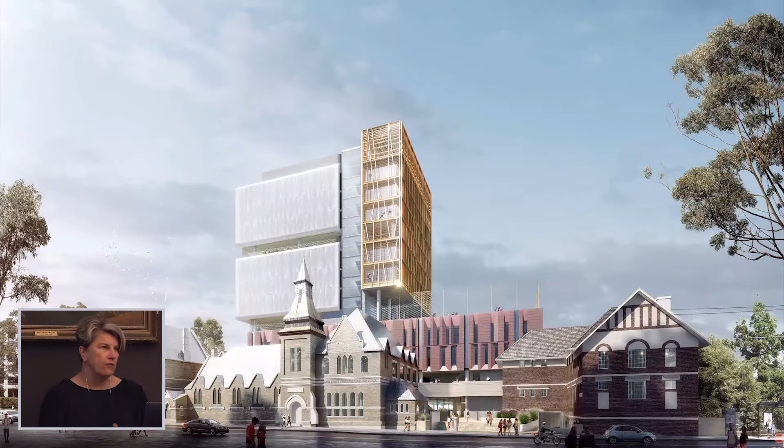Great, thanks a lot, Charlie. And thank you all for the invitation to discuss with you our involvement in this new high-rise education phenomenon. As an architect, education is currently a really exciting and rewarding space to be in. All states in Australia are committing to really extensive construction programs, up to billions of dollars worth of construction. As a practice, we're really fortunate to be involved with Schools Infrastructure New South Wales' new Inner Sydney High School, which is actually their second high-rise school currently under construction in Sydney.

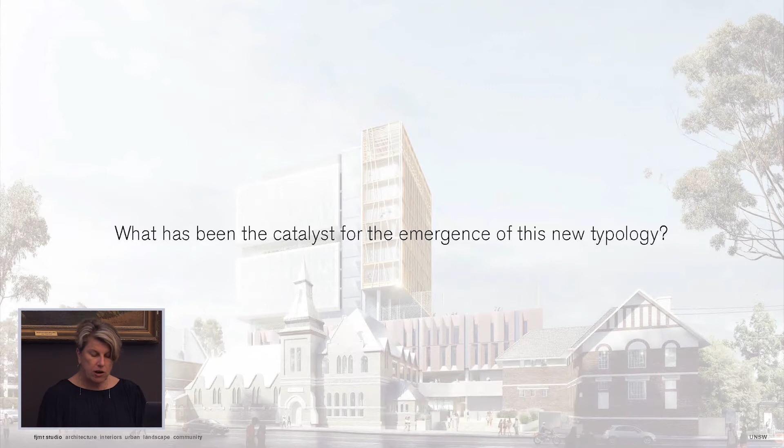This new typology of high-rise schools presents a new challenge. Not only are we exploring new built forms, vertical as opposed to horizontal, but we're also looking at new ways of learning, with the majority of educational providers, be they public or private, launching themselves into the 21st century and designing spaces to facilitate future-focused learning.

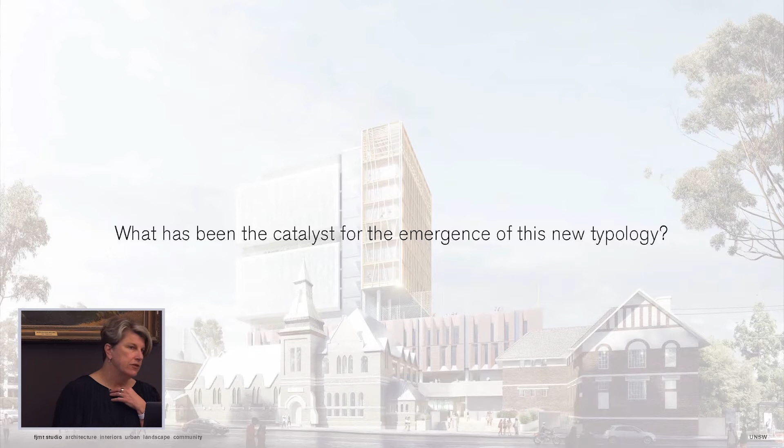As part of this process, there's a few really important questions that we need to explore. The first one is, what has been the catalyst for the emergence of this new typology? The second, what is the relationship between the new pedagogical methodologies and the built environment, and ultimately what actually does a future-focused school look like? How can clever spatial planning, developed out of a set of educational and design principles, provide an appropriate framework for a school which can be adaptable into the future? And in this context, how can we actually learn from lessons of the past as well?

And specific to the Inner Sydney High School, how can we provide a flexible framework while responding to the reality of a highly constrained site and the pragmatic requirements of a large complex building? The interesting thing about these high-rise schools is all the benchmark data which the departments of education in the various states have is always based on horizontal schools, not on vertical. So there's a whole lot of other aspects which have to go into a vertical building, such as smoke exhaust, lifting, things like that. So how do we actually wrap that into current budgets and also briefs which are pre-formed by these departments?

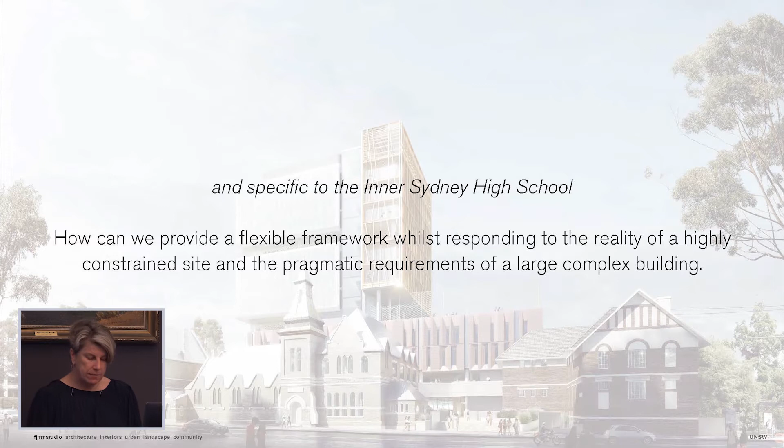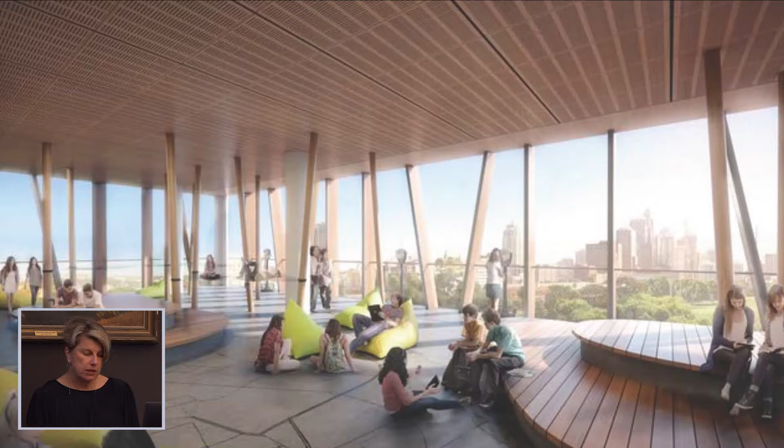Using the Inner Sydney High School as an example, I'll try and give you some insight into how we as a practice started to investigate these issues. A quick background so that you can understand our context for this new school typology. FJMT, we're the head design consultant for this project, following a successful design competition, which came out of an extensive EOI and RFT process, which actually commenced in 2015. The competition was informed by work which was done by the New South Wales Department of Education, DWP Suters and New Learning Environments, who are educational consultants, on the development of a framework for a new vertical campus, and that formed the basis of the brief, which we then took into competition mode.

We were awarded the commission at the beginning of 2017, and now we're approximately 2 months into a D&C contract with the main contractor, who's Hansen Yuncken. And 2 days ago, they just started doing the first excavation, which was pretty exciting. Our brief is for a comprehensive co-educational high school of 1,200 students.

The school will serve the local area, and it provides relief for the many high schools which are either at capacity or nearing capacity. We don't yet know who the school community will be, but it's essentially going to be the inner city students who live in the adjacent suburbs. They're still working out what the boundaries are.

It's primarily a school for the community, and I suppose the reality of who the community are will be evolved once the new principal is announced, which is actually quite soon because the academic year is almost finished. An important aspect of this school is that, similar to other major schools that the New South Wales Department of Education are developing with new pedagogical approaches, the principal will actually have the opportunity to handpick their staff, which is very important because it means the staff will be completely engaged with the model, which will probably be the success of this school.

The new inner city high school is the second high-rise school to be developed by New South Wales Department of Education. The first, the Arthur Phillip High School by Grimshaw and BVN, is a transformation and then an expansion of an existing school with a new 17-storey tower to accommodate 2,000 students in the tower portion. Arthur Phillip is quite different from this school because here we are working with the theoretical model. At this point we have no staff, no students, so it's really quite an interesting exercise to go through that process.

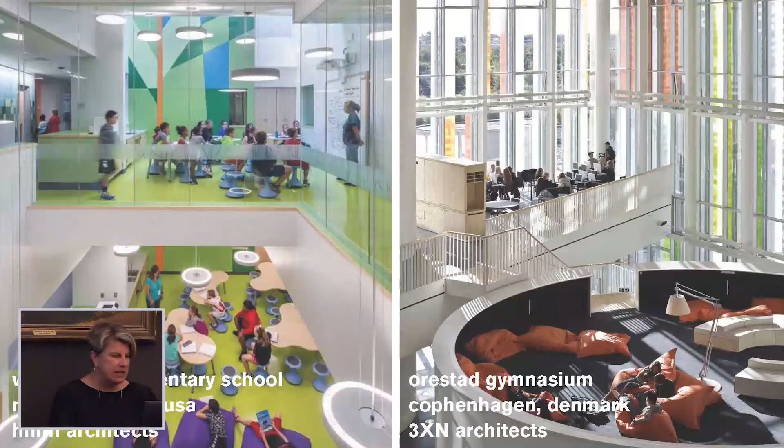And this is what we now see as images of future-focused learning. The one on the right is one I think a lot of people are familiar with, which is the Ørestad Gymnasium in Copenhagen by 3XN, which really pushes these boundaries of new ways of learning.

The outcome of all these criteria of creativity, critical thinking, etc., is that we need to design spaces that are flexible and adaptable. They can either be opened up or they can be enclosed. They can have the capacity to change character through different furniture settings or servicing requirements.

In the context of the inner city high school, we tested these ideas with a cross-section of stakeholders, as we didn't actually have a community yet. From across the Sydney region, there were school principals, administrators and teaching staff, and also students who are currently exploring different teaching and learning methodologies. And in many instances, they're actually doing this in entirely traditional surroundings.

This actually enabled us to develop a specific educational model coming out of the competition. And this model then sets up a framework which can be further manipulated once the new principal comes on board. These stakeholders were really our greatest resource. Although they were not always spatially literate, they do have a deep understanding of what they might need to facilitate these new ways of learning.

Also, as educationalists, they were actually great communicators, and so they're very open to have this exchange of ideas with their peers. So what we had is a series of day-long workshops with a lot of discussion about topics that NLE facilitated, talking about how we could mould this new model to education in New South Wales.

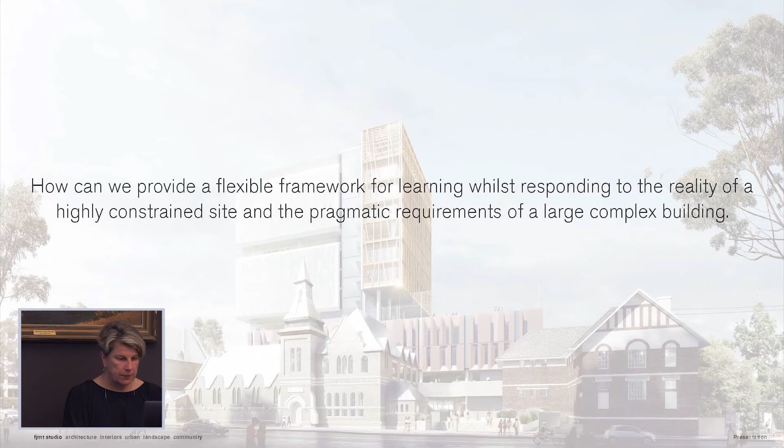This takes us to the second question of how we can provide a flexible framework for learning whilst responding to the reality of a highly constrained site and the pragmatic requirements of a large, complex building. This is where we can start to apply the ideas of the first question onto the site, which is really the domain of the architect and a place where we do feel most comfortable. To us, one of the fundamental aspects of any new building is the acknowledgement of the importance of the sense of place and a belonging to the site, the contextual environment. And this is really important in the context of a community school.

The site for the inner city high school is actually quite unique. Since European settlement, the site has always operated as a school, with the first building being an ironclad building which was built in 1856. And then subsequently they built a series of buildings. There were 3 heritage buildings on the site. This is building 1 and then building 2. And then there's another one which now sits in front of this one.

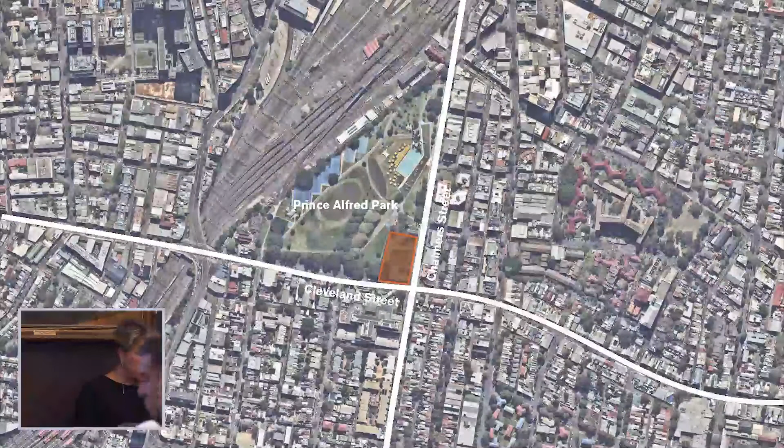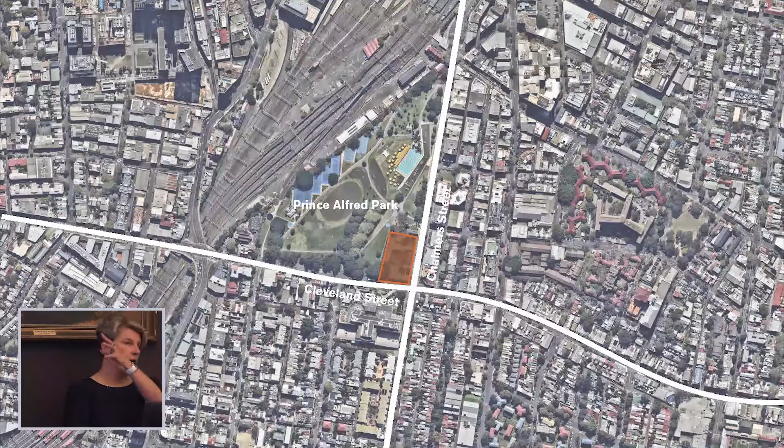The site also is an archaeologically significant contact site. There's a first contact, which means that some parts of it haven't actually ever been excavated. And actually a waterway ran through the site which fed into Blackwattle Creek, so it would have been potentially a camping ground for the Indigenous population, or at the very least it was a pathway that took clans down from Botany Bay down into Darling Harbour or to the harbour. So we actually went through a fairly extensive archaeological program on the site as well.

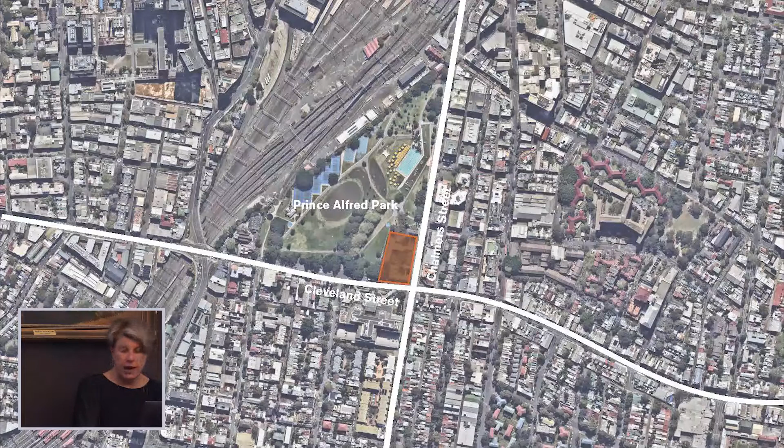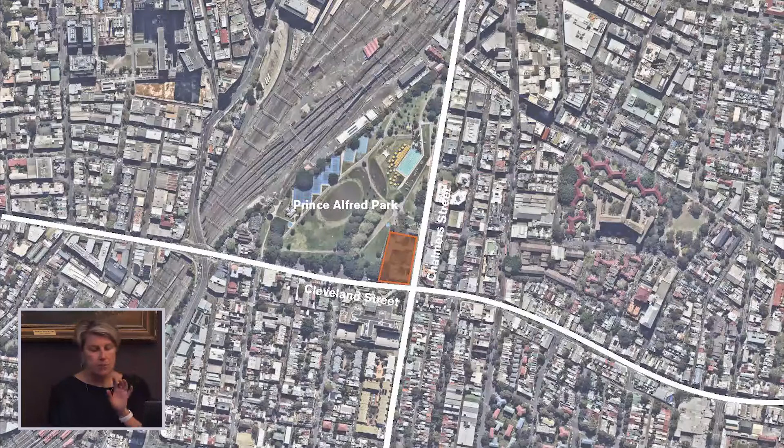The site's located on the edge of Surry Hills. It's both a local site, but it's also a city regional site. So it's visited by people who belong to the area, but also it has people passing through. You can actually see in this image where Central Station is, just up to the top of the screen. So it was actually quite important for us to understand what this essentially transient population means to a school sitting on the edge of that.

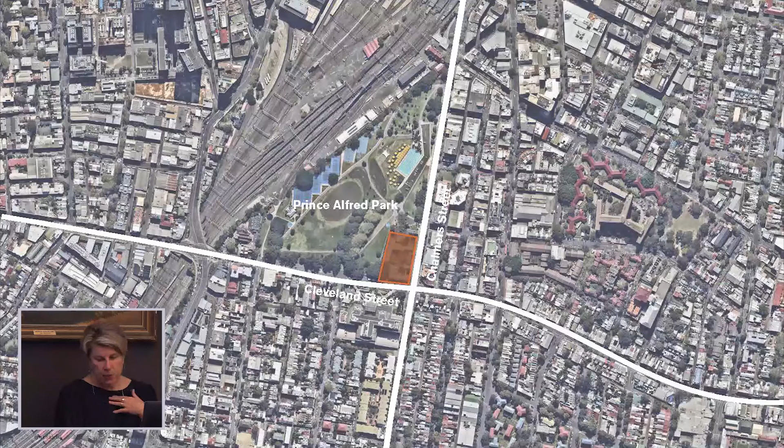We're really fortunate to have Prince Alfred Park, which actually surrounds the site, and over the whole life of the school, there's been a relationship with the sharing of this resource of the park, and there's been an agreement with the Department of Education signed with City Council to have a shared resource between the school and the park.

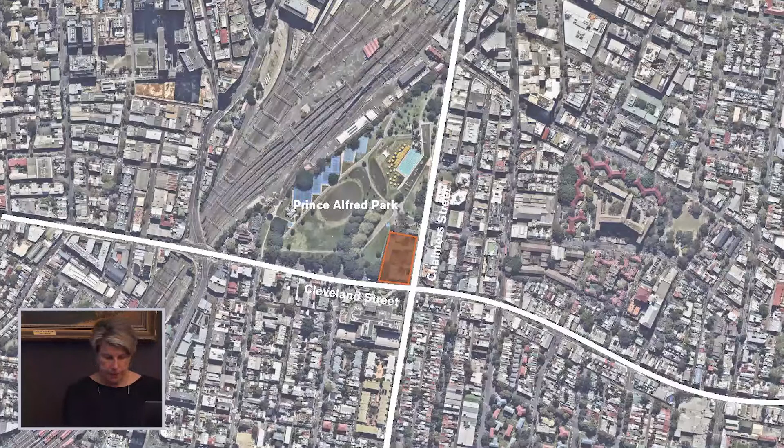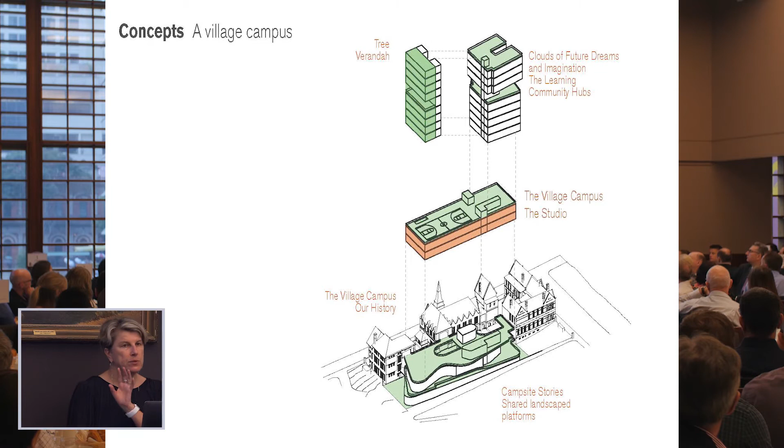Our response was to create a campus to break down the elements into a number of clearly identifiable parts. It was very important that the landscape terraces related to the park. We then had a studio volume, which is where we have our art and design and technology areas. We then have what we call the verandah, which looks over the city, faces north, and that's where we have outdoor learning. And then the learning hubs, which are to the south, which look over the suburbs which the school will be serving. I've just got a conceptual animation here, which gives you a sense of the scale of the elements and their relationships to each other within this campus.

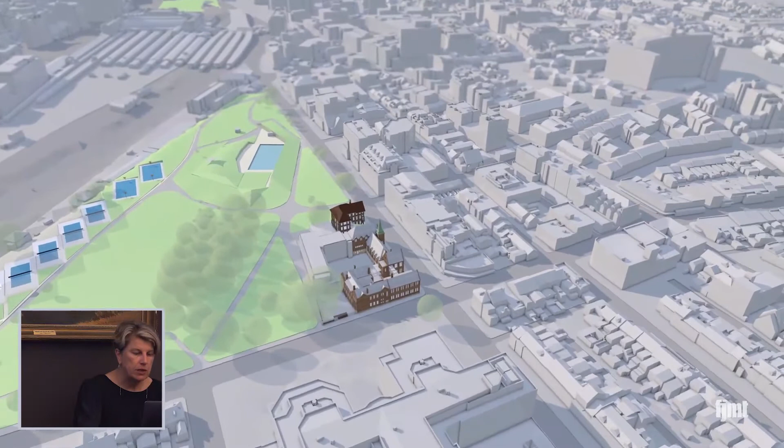We very much saw the site as being a campus of buildings, and it was quite important that we broke down the scale of what is a very large building on a very constrained site. So this is where the site is placed. It's actually placed on a major arterial road, Cleveland Street, so it does have fairly significant acoustic constraints as well. So this is the site before, with the 1969 building, which has now been demolished. So that's this building here. There's a couple of very significant fig trees on the site as well, which we have to be mindful of as we're placing our new building.

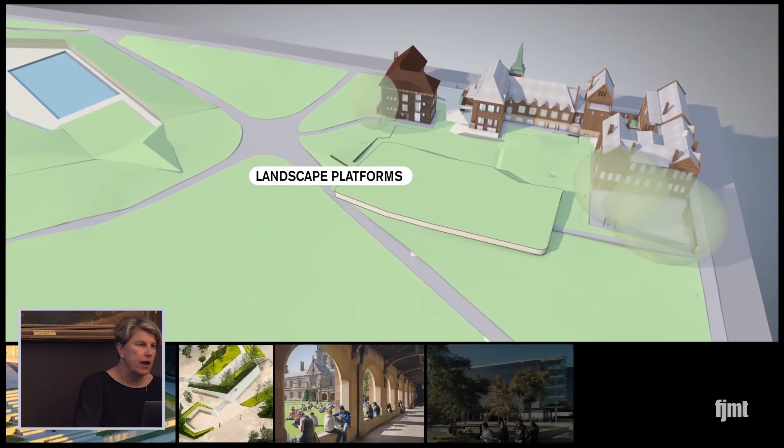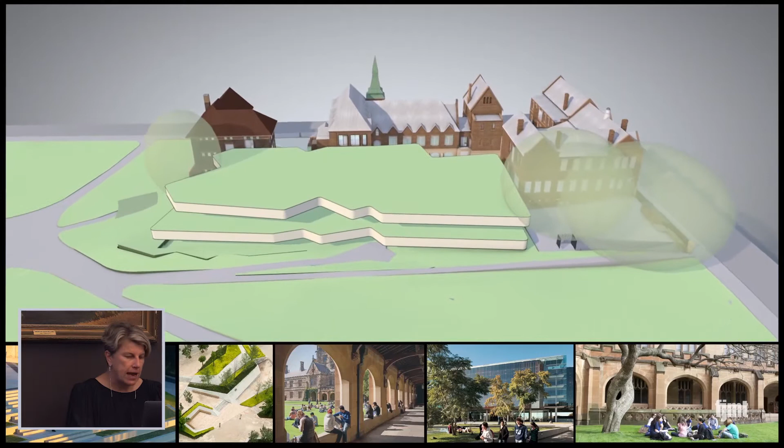So then this is the idea of bringing the park into the school. So you have this really strong connection with the landscape, and that's something which will be incorporated into the curriculum as the students move through the school. These landscape platforms are actually where all of our public areas are located as well. There were some quite beautiful spaces in the existing campus, so they're being enhanced and retained. So there's an amphitheatre, for example.

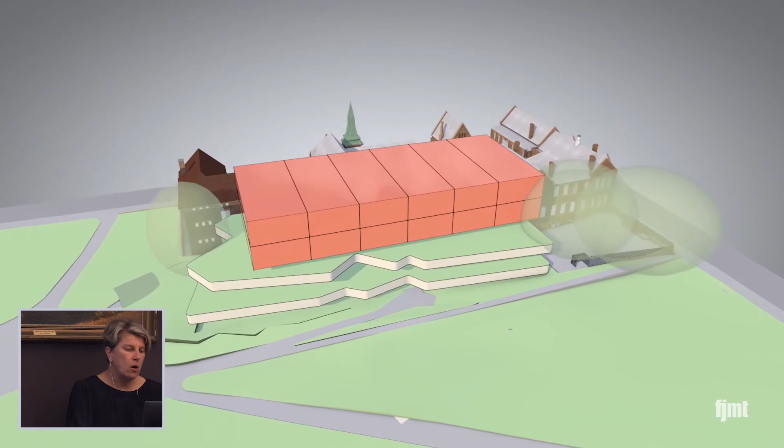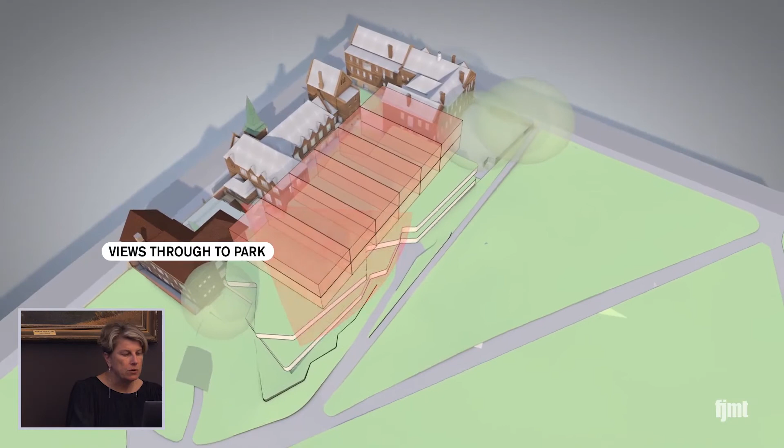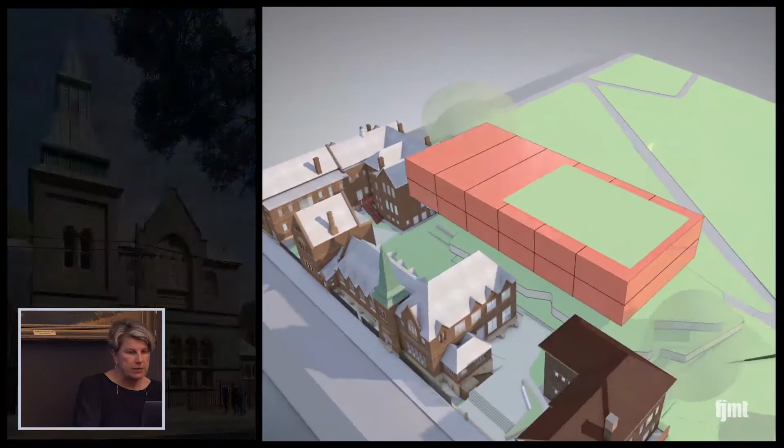The heritage buildings, it was really important that we gave them the same respect as the new building, because they operate as part of this campus as a whole. So our new building is very mindful with its form and its articulation that it actually followed the rhythm of the heritage buildings. Views through to the park from the lower levels, and especially upon entry to the school from Chalmers Street, which is the main access to the school itself. The movement around the lower levels is horizontal, and you're always accessing the heritage buildings through the new building, and that was to provide us with accessible access throughout the whole campus.

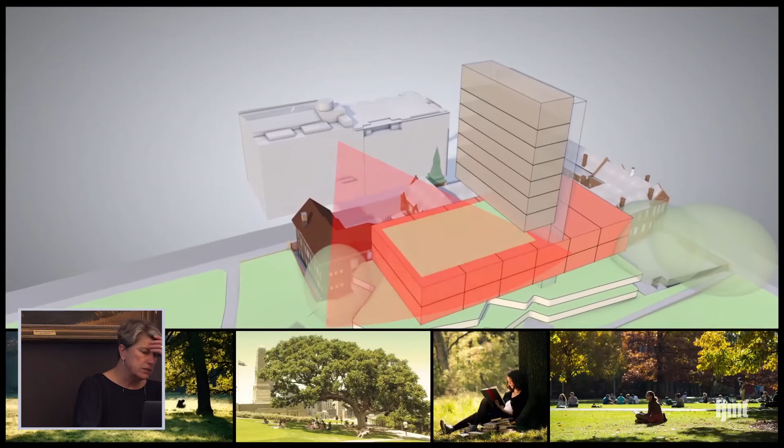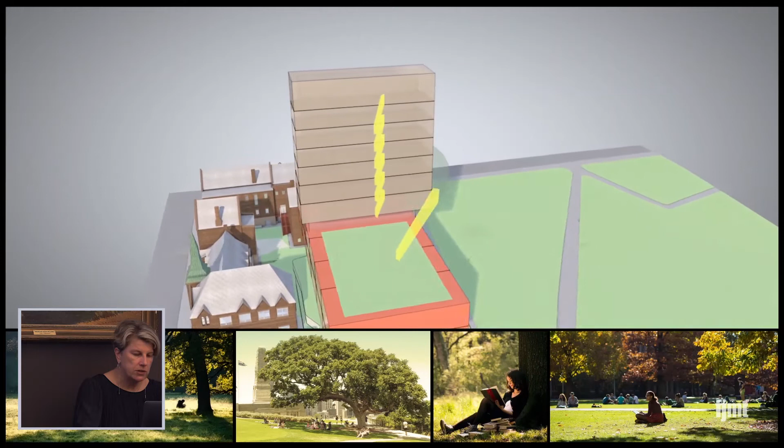On top of the new building, this is the outline of the original planning envelope, which was basically a box we were given to plan within. What we did actually choose to do is set back the tower form, and that was really to provide a lowering of the scale to the surrounding context, and also to provide light and air for the adjacent apartment buildings, and then also to bring light into the basketball court, which is located on top of the studio box. This is where you see the veranda, and then we have the hubs that will come in behind in a sec.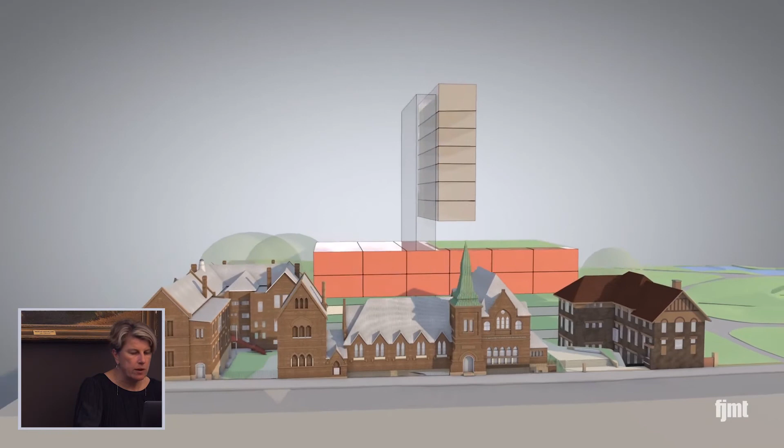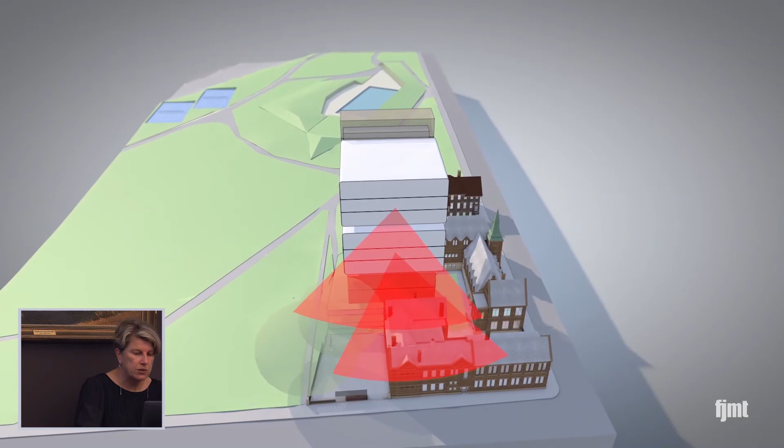What we did is we created a forecourt off Chalmers Street, looking at the existing context. It was quite important that we framed the heritage buildings behind with the studio and had quite a quiet elevation. And then this is the two boxes which come in. So what we have is three floors, then a terrace, and then three floors. Because this site is vertical, it's really important that we do have adequate outdoor recreation area. So what we did is we inserted a number of open play decks throughout the floors.

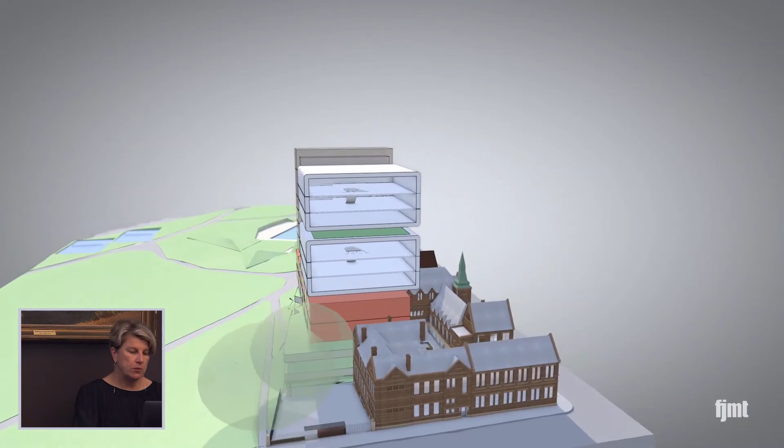There's vertical connection within the learning hubs as well, and that enables the students to move maybe just between 3 floors in a day. And here you see the upper level play deck, and then we've also got one up on the roof as well, and there's a rooftop garden too, which they'll use for agriculture. So that just gives you a bit of a sense of the massing. You can just see there the glimpse through to the park.

I mean, the interesting thing about this building was that for the Department of Education, it's a new challenge for them, because they will now have to basically maintain what is essentially similar to a high-rise commercial building with the systems that you need. So we need to have facade maintenance, we need to have robust facade materials. They actually have to have a maintenance strategy which is in place and done. So that's actually been something which has to become part of our return brief back to them.

Within this contextual framework, the question is how can we design for flexibility which could last for another 100 years? One of the interesting aspects of the existing buildings is that due to their generosity of space, they've got incredibly high ceilings, they've got large rooms with large windows. This photo we took at about 6:30 at night a couple of weeks back, which actually let in abundant light. So interestingly enough, these old buildings are actually quite adaptable. So we're doing minimal demolition to them, and we're actually managing to insert our new model within these existing forms.

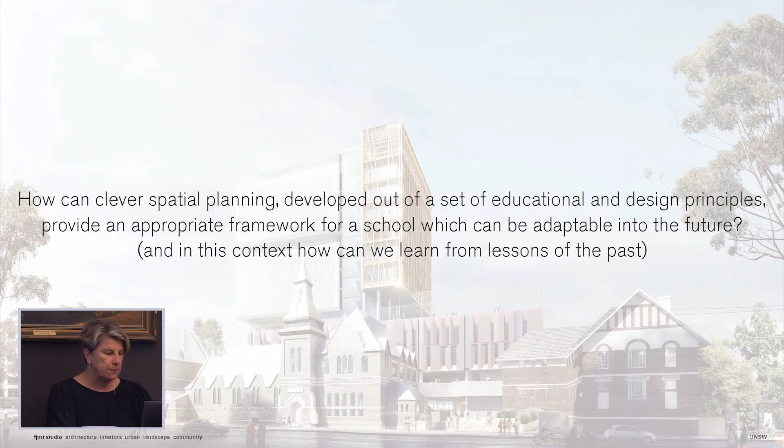So then specifically looking at this question of how can spatial planning developed out of a set of educational and design principles provide an appropriate framework for a school which can be adapted into the future. There's a number of fundamental givens which are consistent to any school design which is future focused.

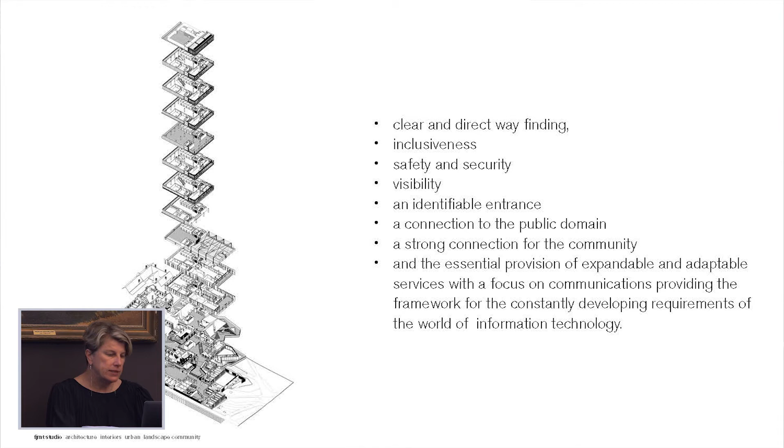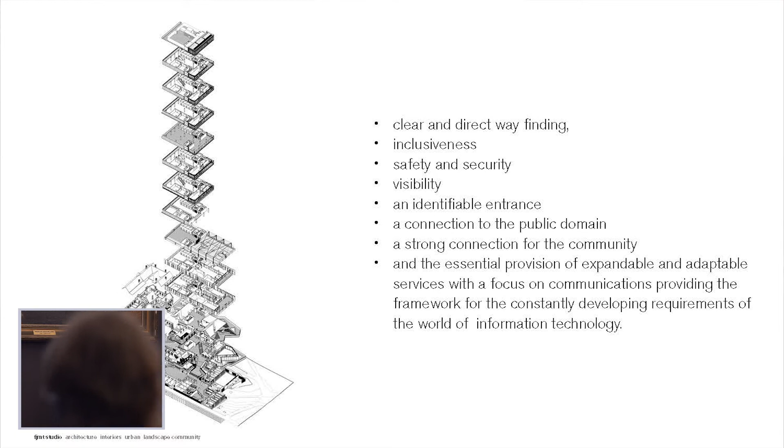A clear and direct wayfinding, inclusiveness, safety and security, visibility, so visibility of the learning and also visibility of what the students are learning, so that's looking at things like writable walls. A clear identifiable entry, a connection to the public domain and a strong connection to the community. And also the essential provision of expandable and adaptable services with actually a focus on communications so we can constantly adapt to the ever-changing world of information technology.

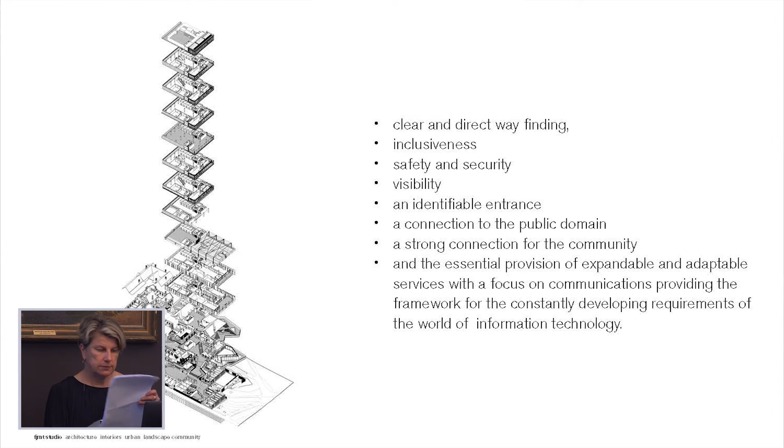Our model can be distilled into a simple diagram. The building is 14 stories tall, plus the roof. But as I said, the typical day of a student will only be across a few of these levels, with the majority of the movement via staircases. And this is where the adoption of the educational model will be fundamental, and also the ongoing engagement of the teachers to understand how the learning environment can actually work in this way. We did test the school with a traditional model, and it really does rely on the future-focused learning to work.

So what we essentially have is the lower levels are where we have our student-focused areas, and also the large gymnasium. We actually chose to sink the gymnasium into the ground. We're just now coming out of the havoc that caused with regards to in-ground services. We then have a large play deck located on level 1, then above that is suspended the studio box, and then above that is the general teaching hubs.

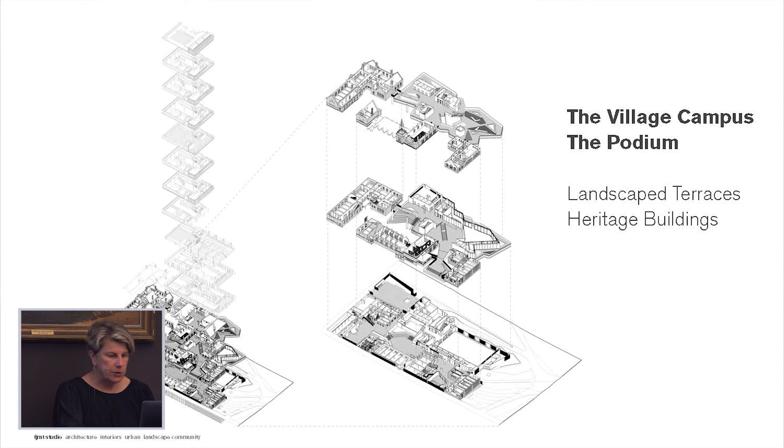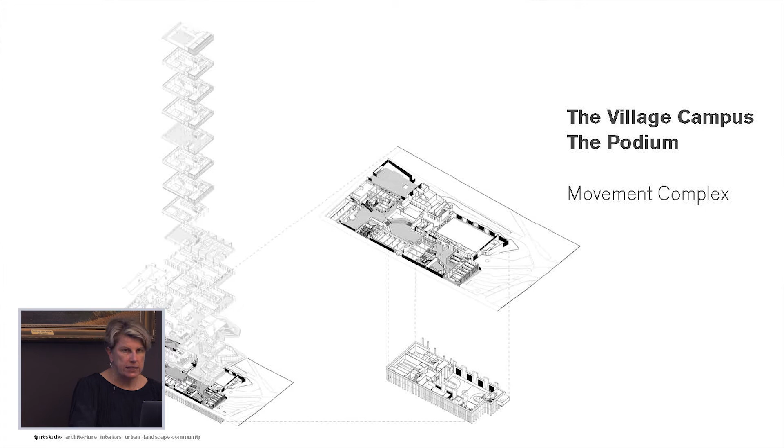So the campus is divided into a series of key elements. We call all the lower levels the village campus, and that's essentially the podium, which has landscape terraces and the heritage buildings. As I said, the movement complex, which is a gymnasium and associated teaching spaces, like there's a sort of a dance studio, is located in the basement level. The heritage buildings are completely connected into the new building, and access is always from the new buildings.

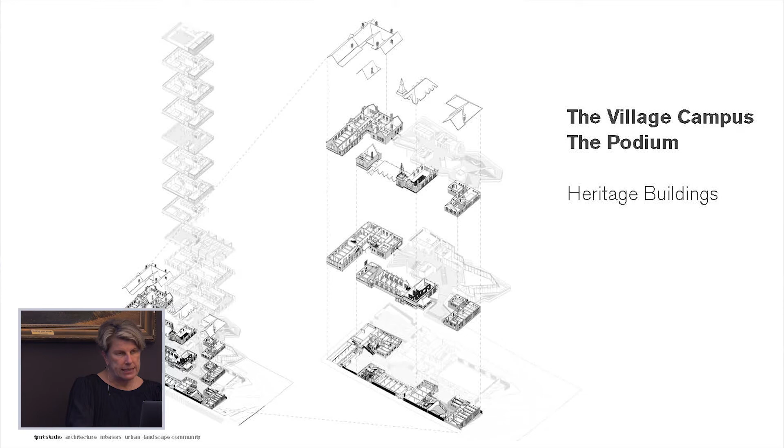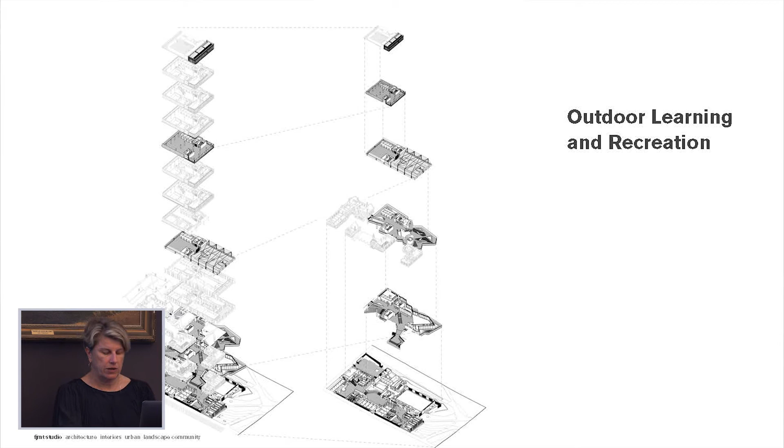Outdoor learning and recreation is scattered throughout the whole school. After we'd actually done, I think, or maybe it was during schematic design, the Department of Education announced that every child had to have 10 square metres of external play space, which we do just have with our current scheme, and we now have a shared relationship with the park, so they will be using a part of the park when they actually reach their population of 1,200. The studio, and then finally the learning hubs, which are divided into 2 blocks.

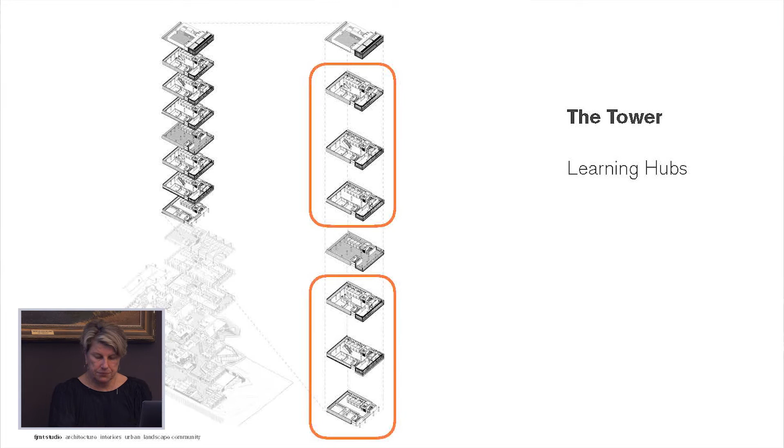I'll just take you through in a little bit more detail some of the areas, and just to sort of explain how the model works. So the campus, the lower levels are divided into a series of hubs. So we have the Welcome Hub, which is really what you would traditionally know as the school administration. The Student and Community Hub, which includes the Resource Centre, so the library.

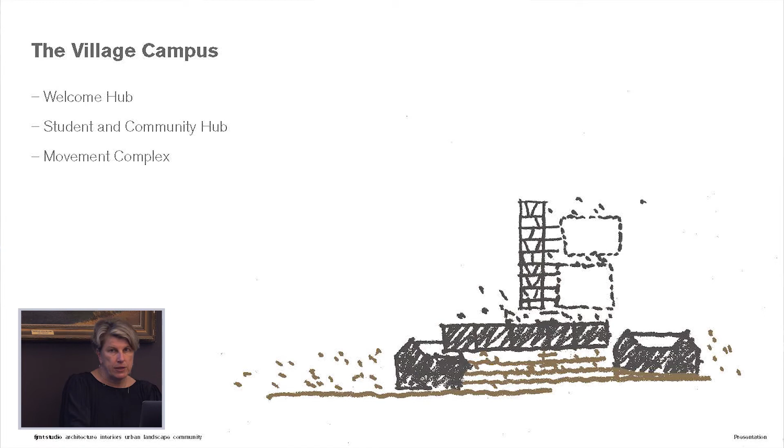It also has the Deputy Principals in there, the IT Help Desk, school counselling, and also things like the school cafeteria. And there's also a lot of spaces which are student-led spaces, which the students can have for their own to do things like workshops or group work, that type of thing.

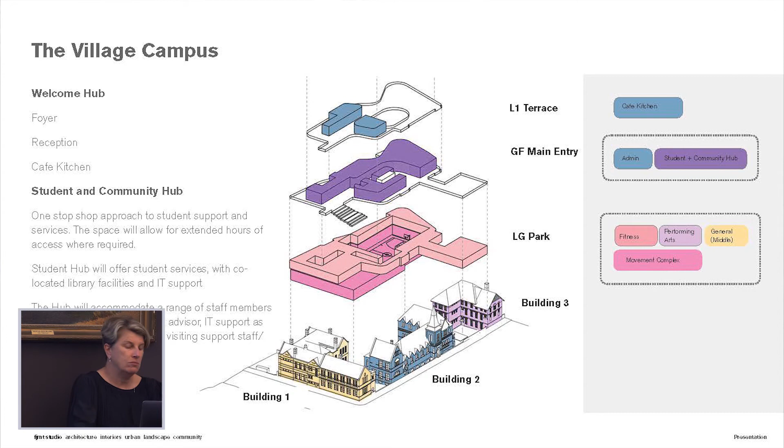These levels are also where we've got our community engagement. So the idea is that all of the lower levels will always be accessed by the community. This is something that once the principal's on board, they will then work out exactly how that will work. But essentially we have Building 3, which is our performing arts building, is potentially able to be accessed. Also the large gymnasiums, and then potentially we might even go further up the school depending on the preference, I guess, of the principal and the school community.

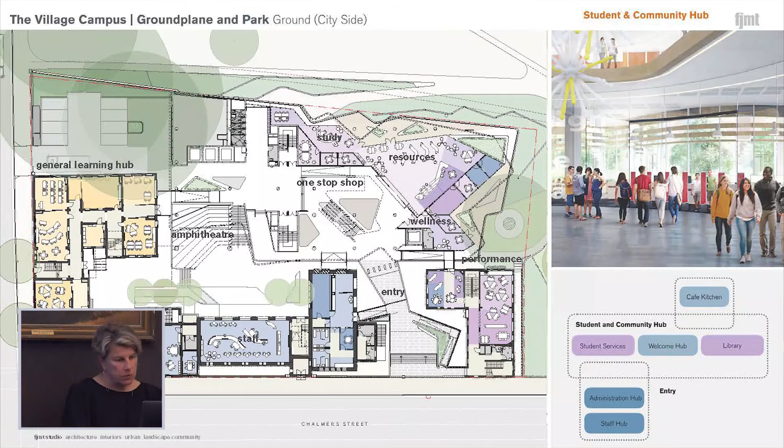So this is looking at the main entry level, which comes off Chalmers Street, and here we did actually indent and I suppose almost gave back a bit of land to the city. We actually had quite an interesting approach to our boundaries, and we ended up having this sort of blurred boundary between the park and the school. So some of the land we gave back to the park, some we actually took over for our access into our building, just around the edges.

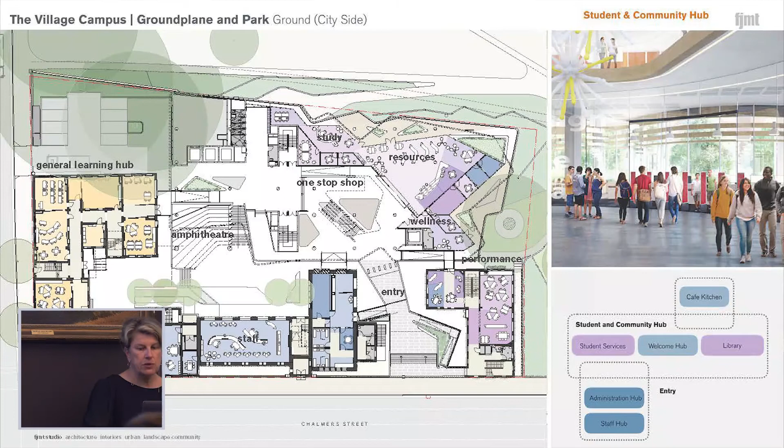So essentially on this level is where we have, I suppose, the main student focus level, overlooking out onto the park. And the idea is that as you come in through the school, you get this great visibility through to the landscape. So this is just a view looking across into the park beyond through the resource centre.

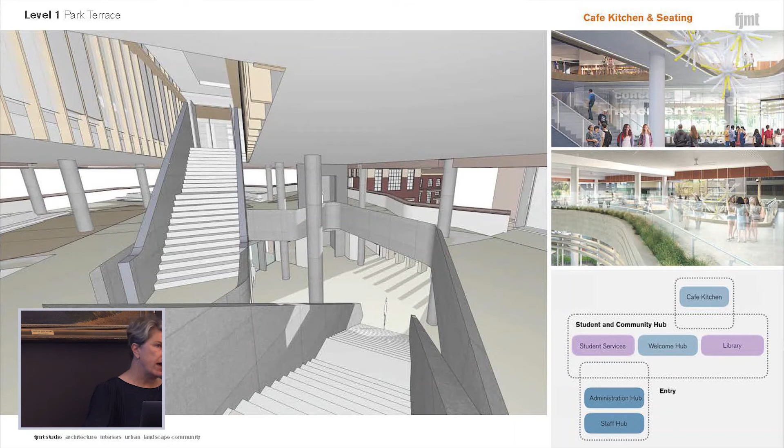A series of stairs take you either up or down. The idea is that the students will circulate predominantly by stairs up to probably about level 2 or 3. We do have 4 lifts plus a 5th lift, which gives public access down into the basement. The 4 lifts, however, will be on destination floors only, so the students will actually arrive at the open learning areas. So they arrive at the level 2 basketball court, or they go up to the next level, which is a large open terrace, or they go up to the rooftop, and then from that they move down into their learning hubs.

Level 1 is a large open play deck. So this was something which actually wasn't in the original brief, but we managed to manipulate the areas to create this very, very large undercroft space. Really vital in this school that we had enough outdoor recreation area, because as you can see, the site is incredibly constrained. This is where we also have the cafeteria as well.

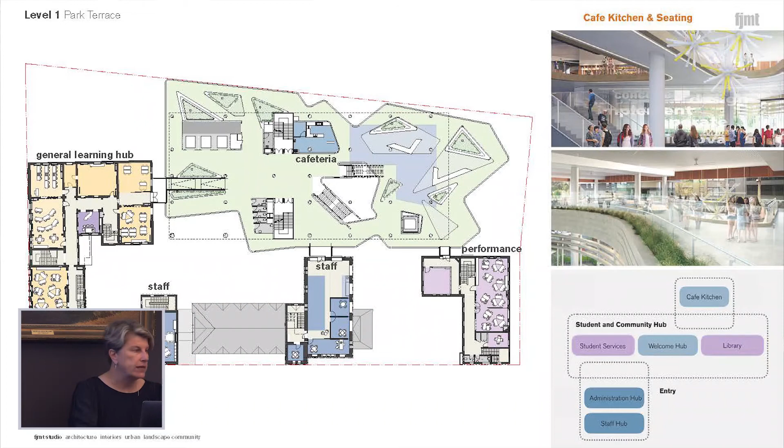Going down, this is the park side. So this is looking out from Prince Alfred Park. So here we have the upper level of the gymnasium, and this is where you'd envisage the main public access will come in. And here we have a whole series of quite diverse outdoor learning spaces as well, which have been created with the existing spaces around the heritage buildings. And then the movement court down the basement and the movement studio, plus supporting facilities.

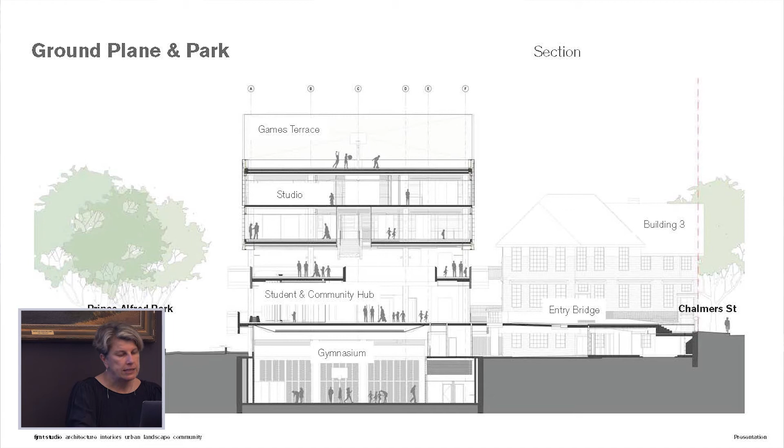So you can just see here with this section how we do have this sort of connection through from Chalmers Street down to the park. We do have the advantage of this change of level, so we actually could use that to our advantage and create, I suppose, a series of spaces which look into each other, because I think one of the most important things about these types of schools is the students are always aware of where they are, and they can always also identify, I suppose, where their special place is within the school.

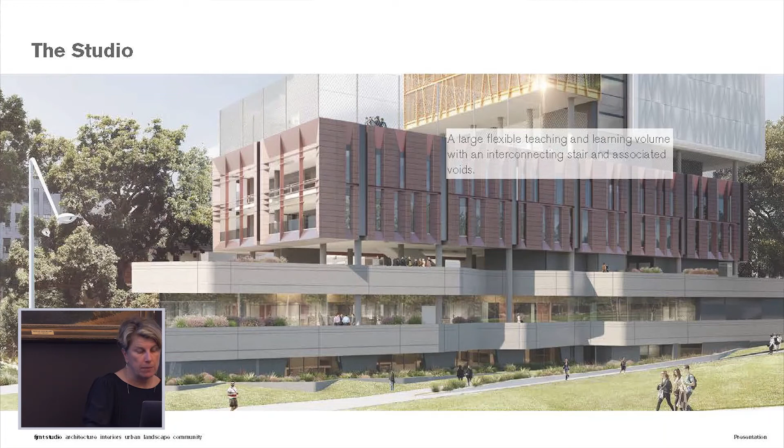But the intention with this is we actually have a fairly flexible construction in that over the whole end of that building we have a double slab, so they can actually change the configuration of those rooms as they need to. We're working with them at the moment, just trying to understand, moving forward into the future, whether a wood workshop and a metal workshop are actually relevant, or it's something that we should be looking at changing. We also do have specialist spaces which are giving us 3D printers and things as well. So hopefully that's the direction that we'll start to move in once the new principal comes on board.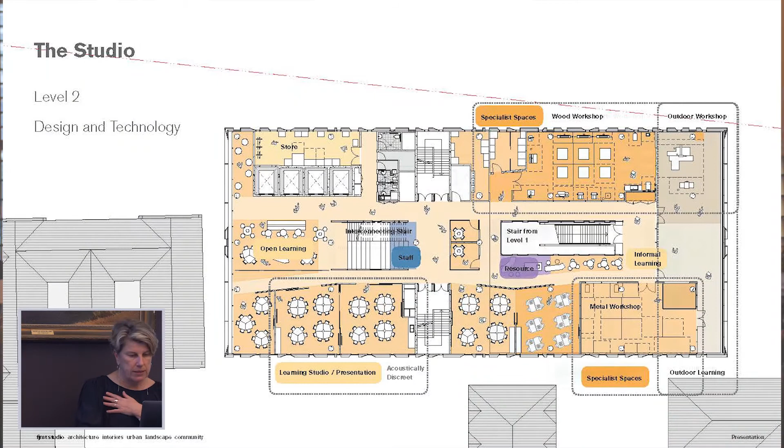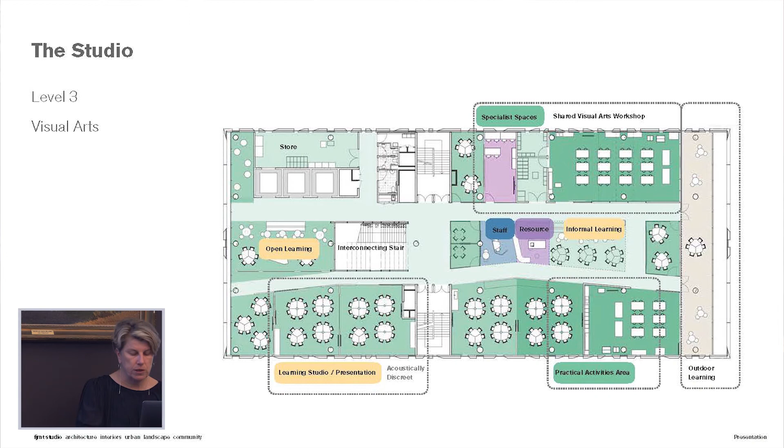We have a large outdoor terrace where we currently have the outdoor workshop, and that's also used as a learning space. The next level up is where we have essentially visual arts, and that's again a range of different types of learning spaces. And they're connected by a large stair which can also be used as a presentation space. So then moving up into the learning and community hubs.

These are essentially smaller floor plates, so they're more seen as connected, flexible teaching and learning volumes, and they have interconnecting stairs and also voids. So the idea is that potentially, maybe a grade 10 student could spend their whole day up in one of these hubs.

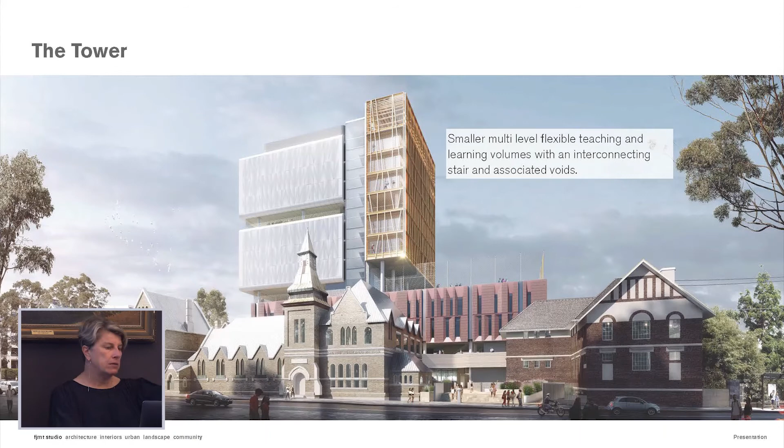The brief was actually developed through the lens of STEM. So each of these hubs does have a science lab attached to it. We also have all of our open learning spaces, the majority of our presentation spaces have a maker space which is attached to it as well, which is essentially an area which has got water, it's got appropriate workspace for doing things like making, cutting, that type of thing. So they're scattered throughout the whole floor.

On the lowest level, we have a food technology space, which is probably the only hub which is not a general learning hub because of its very specific nature. With this school, we had 3 special streams that we could look at, and it was seen by the stakeholders that food technology was quite relevant to the demographic which we were in. Performing arts was another one which we have in an expanded brief on.

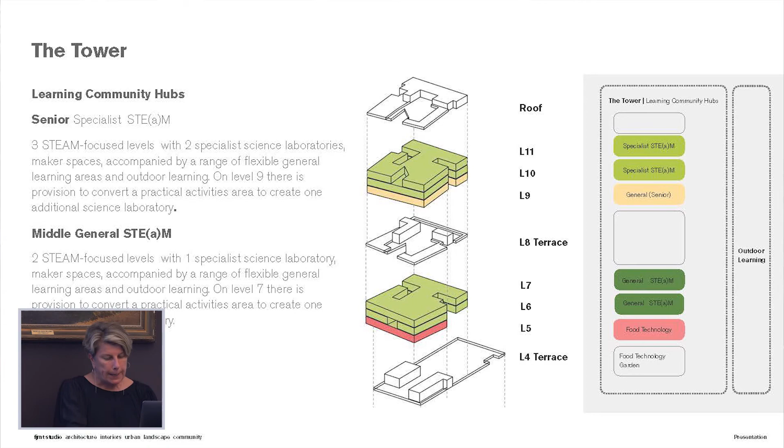So this is our typical learning hub. It's about 850 square metres, so it's actually quite a small floor plate. And that was driven by the constraint of the site, this very dense site, and this very strong contextual preference not to overwhelm the site with a massive building and to really respect both the park and also the heritage buildings.

So on this typical floor, you have on the veranda space an outdoor learning area. You have a science lab, and the idea is that the science lab can actually all open up to the outside, the doors can all slide back. We then have in the centre the open learning, and that will actually accommodate 3 groups of 30 kids. We have presentation spaces, which are the enclosed rooms. The idea is that the presentation spaces can actually open up into the open learning, or they can shut down, and they can either be one large room for 60 or 2 smaller rooms for 30.

We then have in the purple the resource node. Essentially the resource nodes are little mini libraries which are scattered throughout the tower, and so again, that reduces the need for the students to move all the way down to the resource centre on the ground level. So they've got specific material located up on these levels which they're occupying. Similarly, we have the staff touchdown space as well, and then we have small interview rooms and seminar rooms which support the learning if they need to have one-on-one instruction, for example.

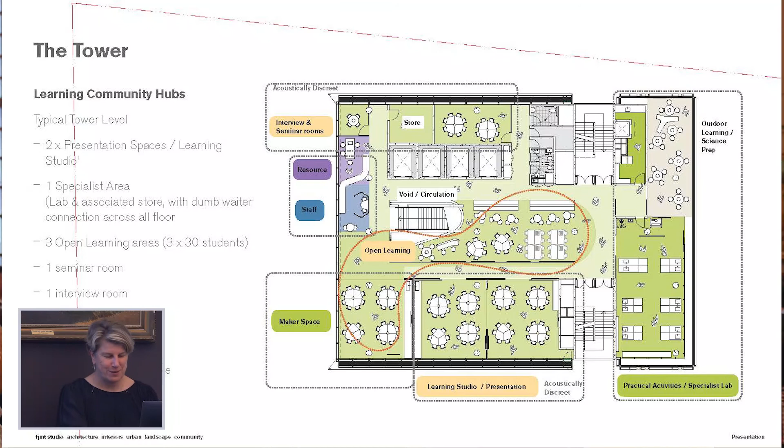Throughout the school, we've got a whole number of active and passive play spaces, and I think they're a really important part of the learning model. And also one of the parts of the brief that was given to us by the Department of Education was this desire to use the building actually as a learning tool, and so to really understand structures through the building.

So we're working through with HY at the moment, thinking of ideas of how we can actually incorporate this idea of building as an anatomy through the scheme, and that could be things like informatics. It could be exposing structure. It could be demonstrating structural diagrams. It could be looking at how we use solar, how the sustainable features operate.

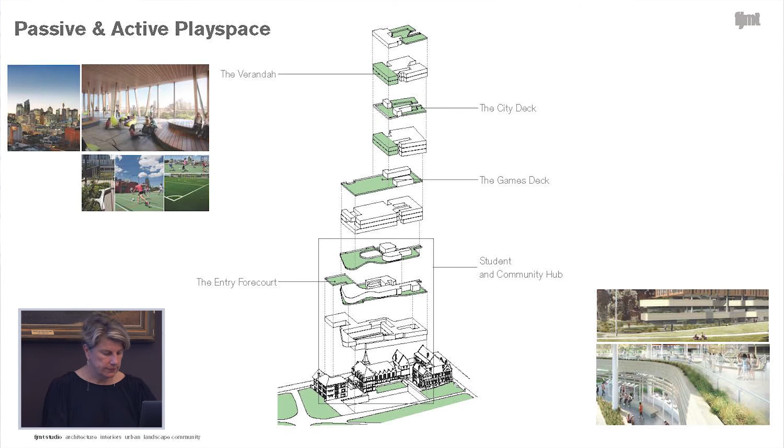So as I said, we're now in the construction phase. And before I end, I would like to actually acknowledge the consultant team. We had a pretty large team. It was a state significant planning development, so we had the raft of consultants who helped us get all of our reports together.

And also the Department of Education, who have actually been an incredibly exciting client to work with. The PRG that we work with are very engaged with actually making this work. And I think we all feel as though this is very much a project which is breaking new ground, predominantly from an educational point of view. So it'll be really interesting to see how it evolves over time.

And NLE will come back with us and do some post-occupancy to understand how what we've done can then inform schools of the future. Ultimately, we're designing a building which will be inevitably inhabited, and it will be changed by the people who use it. Internally, it has actually changed quite a lot since our competition brief.

I think our approach to design for this building has really been informed by the educational model. There is a contextual overlay, but I think we were very cognizant of the fact that we are actually designing a school; it's for students, it's not for architects. And the success of this school will really depend on the continued engagement with the teaching staff, and how they begin to work with this more diverse range of teaching spaces to enable the students to reach their full potential. Thank you.